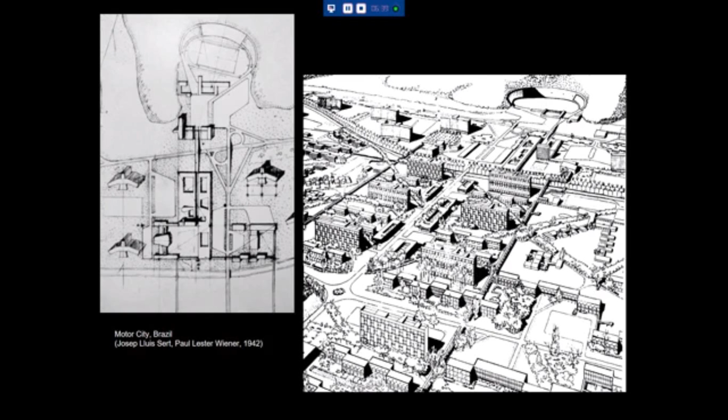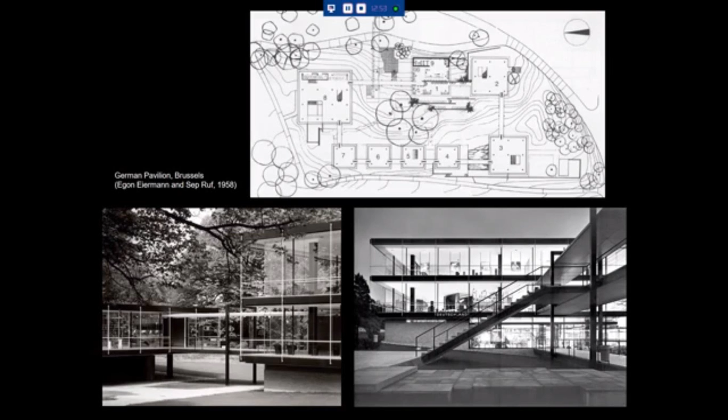This is a particularly good example from Europe, an early example, based on this campus type. This is an exhibition pavilion for the 1958 International Exhibition in Brussels by Egon Eiermann.

Very clear concept. The entire complex consists of 8 pavilions in 3 different sizes—4 small ones, 3 middle ones, and 1 large one—arranged around a cluster of mature trees, taking notice of the existing landscape. All are linked via walkways which strengthen the horizontal emphasis of the facility and help mediate between the different levels, as it's a rather slopey terrain. The pavilions themselves are all square and accessed asymmetrically, off the central axis. So, very clear concept-driven scheme.

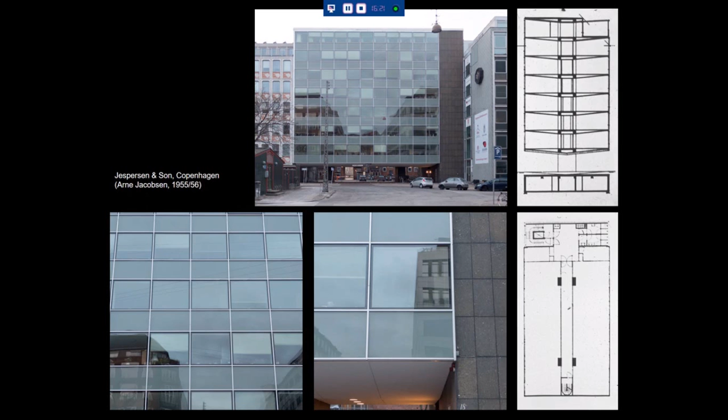This one here is inspired by the second type, the curtain wall high-rise type. Obviously this is not a high-rise, but you can clearly see the curtain wall, strongly inspired not so much by Mies's own buildings but by the Lever House—the detailing, the elevation treatment, and also the green-tinted windows, which was telltale of the Lever House. It's quite an interesting building, this one.

You go underneath the building and turn right, and this is the main entrance, which brings you into the vertical circulation core. Then you go into the actual office level, completely free of support apart from two pairs of concrete piers which carry the entire building and support these cantilevering floor plates, which taper towards the edge, allowing Jacobsen, the famous Danish architect, to attach the curtain wall to either side of the building. Now, the interesting thing here is that it sort of fakes its machine aesthetic.

In the United States, this type of architecture was possible, supported by a totally advanced building industry which prefabricated all these elements, only to be assembled on site. In the case of the Lever House, the building is a clear expression of the method by which it was built. Here, completely different—building industry in Europe wasn't as advanced yet at the time, so they couldn't actually prefabricate these things. This facade, although it looks like the result of very advanced building technology, is in fact handmade, all of it.

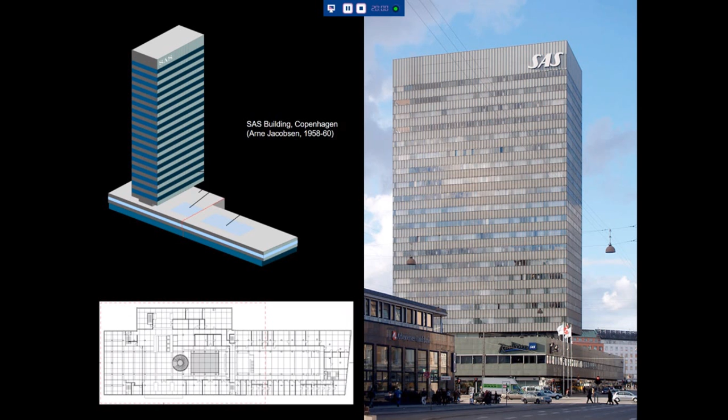So make the means available to us to actually build them. And they did—only a few years later, this is another building, also by Arne Jacobsen, a couple of blocks up the road, and this one is completely prefabricated.

To explain the building itself, the SAS building for Scandinavian Airlines System, the national air carrier, it had to accommodate three different things: a hotel, a travel agency, and an airport terminal. Professor Jackson mentioned last week this sort of upper-class romanticism which came with air travel in the mid-1950s up to the early 1960s, before it became commercialized. There was an airport terminal within the hotel, which I find rather amazing.

I'd love to have that. It's a very tight inner-city block, as you can make out here. The hotel is in this tower, the travel agency is here, and the airport terminal is here in this lower building, both illuminated via these generous skylights. The concept is directly taken from the Lever House.

This is called a tower and podium building, one of these post-war building types which were copied everywhere. Tower, podium - dividing functions into a vertical feature and a horizontal feature taking up the entire plot.

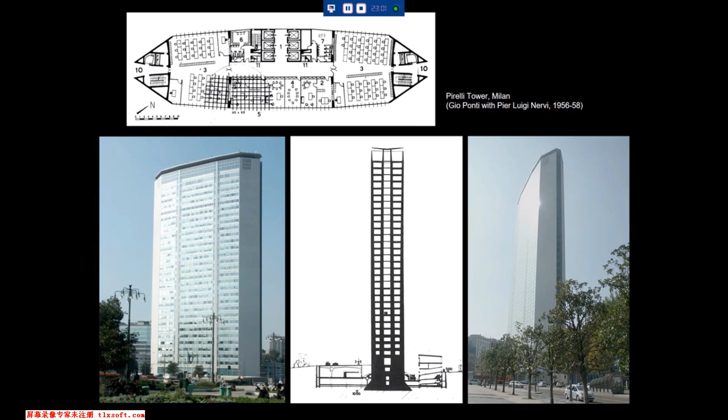The Pirelli Tower in Milan by Gio Ponti and his engineer Pier Luigi Nervi, one of the really brilliant structural engineers of the 20th century. You can see the familiar Miesian features of curtain wall consisting of metal panels and glazing and all that sort of thing. But you also see that this is not a mere copy - it's a really original take on this high-rise building type.

It's extremely slim and extremely high. In fact, it was the highest building in Italy up until the 1990s. Extremely slim, extremely high - you have a serious problem because of the wind loads that batter against the longer sides of the building, so you have to stabilize it.

What Pier Luigi Nervi did was he had these 8 massive concrete piers, which you can see here, here, here, here, and here, and they become thinner. They're really massive at the bottom, as you can see here - proper foundations. And they become thinner towards the top, in accordance with the diminishing structural loads. That stiffens the building.

There's an auditorium here as well. These are all office floors - that's one of them. And this is an auditorium buried underground, about twice the size of this one here. And then over here, a car park as well. And then these massive foundations becoming thinner.

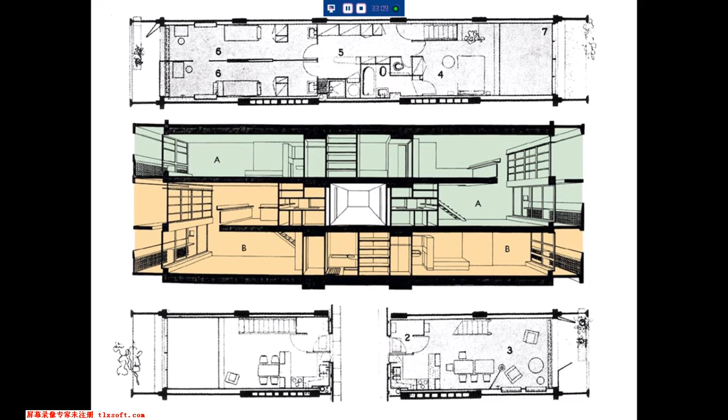This one here has these massive stilts which open up the ground floor. It's a bit shady, but still it opens the ground floor, and children can play there. Then you've got this shopping street halfway up the building, and there are sort of humanizing features in here.

So these colored partition walls between the balconies, and the entire elevation is based on a proportional system which Le Corbusier developed, which he called Modulor, based on the golden section, and in a Renaissance fashion links all the proportions of the buildings to the human body. He was rather obsessed with it.

The overall expression, however, is of course one of concrete. This is really what the building is about, and this is what brutalism is about. Le Corbusier referred to this as béton brut, raw concrete - brut, B-R-U-T - and this is the origin of the term brutalism.

There were functional reasons for this. A massive building of this size requires the participation of different building contractors, and Le Corbusier argued that it would have been impossible to maintain a consistent standard of finishes amongst so many different contractors. So he made a virtue out of this and just left it all raw and exposed.

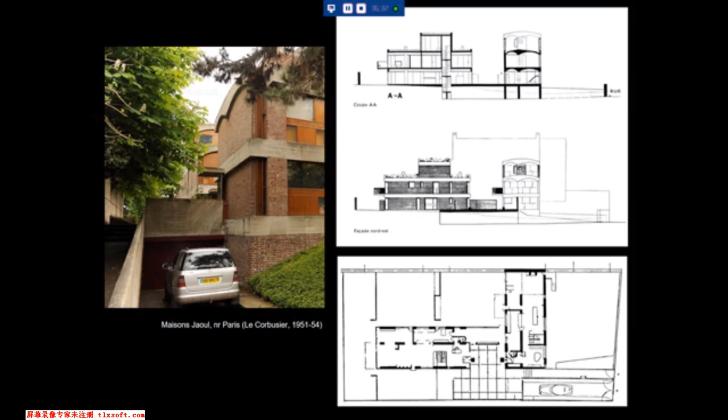Rather cleverly placed on a very narrow site, really using the natural slope of the site well to integrate this little car park, which is underneath the common entrance patio. The patio itself is accessed via this ramp, which leads to here. So underneath here is the car park, and this is one building, and this is the other.

What can we see here? Again, rough, exposed concrete, especially here, and also for these sort of awkward asymmetrical arches. But in this case, combined with two rather traditional materials, which you never would have found in any of these buildings of the 1930s - this rough, deliberately imperfect brickwork, and these timber infills, also deliberately imperfect.

So this is a sort of attempt to link up with a peasant vernacular - to bring modernism together with a time-honored regional tradition, far from being an international style, and also far from the 5 points which Corb had promoted in the 1920s and 1930s.

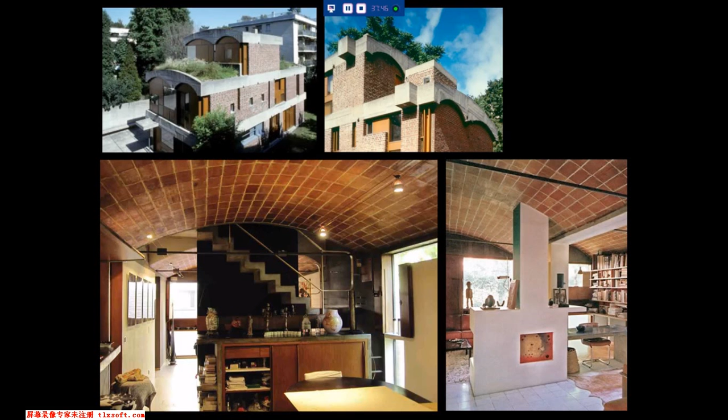Inside, same sort of thing. You have this extremely domestic type of house, which, if you compare it with the Villa Savoye, which looked like a design showroom, this is where people actually live, and it looks like people live here. It's got this brickwork and traditional elements such as these arches - this is called a Catalan vault - with these tiles, and a turf roof. A real change in expression and approach, as opposed to his earlier buildings.

People struggled with this - all of a sudden their admired master built something that seemed completely against his own principles. James Stirling, probably the best British architect of the past 100 years or so, grew up in Liverpool, studied here as well. He discussed this project and was very dismissive of it, but a few years later he built pretty much the same in his housing estate in Ham Common.

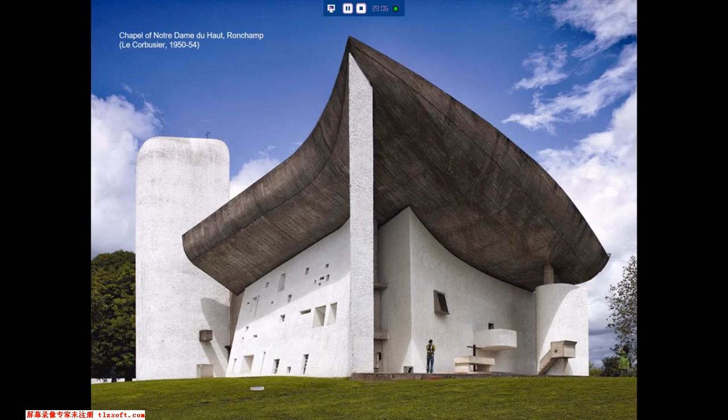So Corb did these two buildings, the Unité and the Maison Jaoul, at pretty much the same time. Both had nothing to do with what he did earlier. Both showed a completely new approach to modern architecture. And then, at the same time, he also built this. Now, this really bemused people.

It's a chapel in the east of France, not far from Le Corbusier's hometown of La Chaux-de-Fonds in Switzerland, just across the border, about half an hour from where he was born. He built this sort of sculptural body which is almost impossible to describe. It's inspired by the contours of the surrounding hills, and it's really a totally unique piece of architecture.

It has these concave walls towards the east and north, which are more or less shut, and then on the other side they're rather convex, bending out, with these random-seeming windows, which were in fact based again on his Modulor. You can see the thickness of the wall when you look at these gun slot windows here, and the walls make funny things - they're really thick at some points, and then they sort of go together, become wafer thin up here. On top of it all sits this heavy cloud of reinforced concrete.

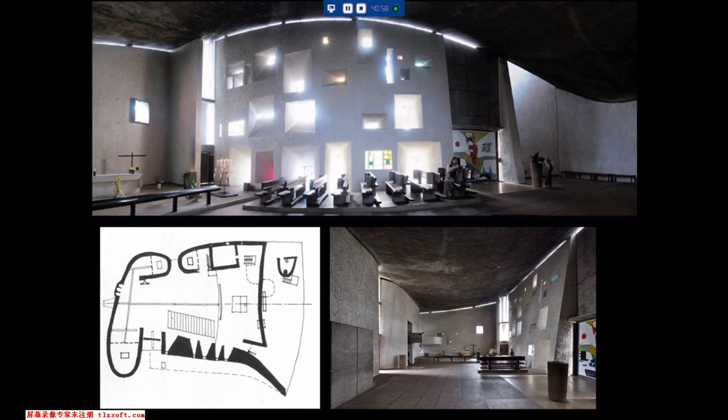Inside, same sort of informal arrangement with these really thick walls and these sort of awkward windows in different shapes and sizes. And then you've got this gap between these pebble dash walls and the concrete cloud, which gives it almost a sort of neon light effect, indicating the curvature of the wall when you're inside it. But the whole thing is almost like a cave - same materials inside and out. So it's really almost like a walk-in sculpture.

Very complex sort of arrangement, but actually achieved with rather minimal means. There are these 3 hooded towers - we saw one of them just now. They're integrated with these curved walls, which are sort of juxtaposed, and then you've got these really thick walls over here, and that's basically it.

So very interesting. And again, a total step away from what he used to do in the 1920s or 1930s. He had this creative explosion, putting forward completely different takes on modern architecture, and this one in particular.

Young architects in Europe looked at this and thought, hang on, our respected master takes liberties with this. Modern architecture doesn't have to be boxy, flat-roofed, white, with ribbon windows. No, other expressions are possible. It really had a liberating effect on his followers, who were most European architects. So if he could do it, why can't we? They started experimenting with different shapes, different forms, and it really sort of almost broke a dam.

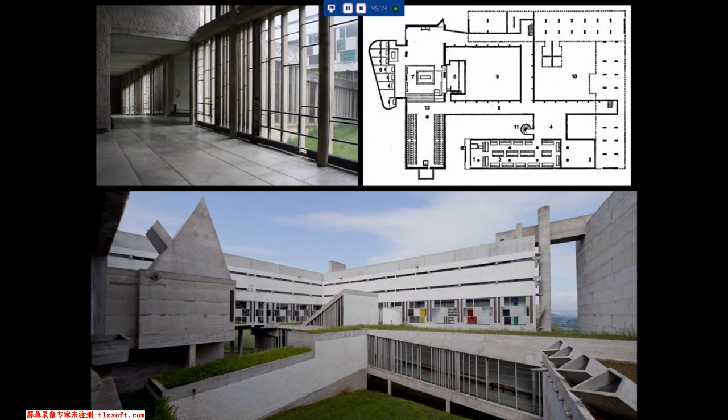So you can see the ondulatoire here, these concrete mullions which are set in front of the windows. Usually in a monastery, the key element is the cloister.

A cloister is a canopied walkway around a common green, a common courtyard which is the public space. The cloister divides this public central courtyard from the more private areas of the monks. That's a cloister, and that's what you usually find in a monastery.

Now, there was no way to have a central courtyard here because of the slope of the site. So what Corb did was reinterpret the idea of a cloister and of an inner courtyard by having these walkways crossing what he called a virtual courtyard. You can't actually access these areas, but you can look at them. And the walkways connect the different spaces within the building, similar to the way the cloister had done this.

So here's the church, here's the refectory, which I mentioned earlier, with this square-shaped atrium in front of it. There are some color accents here within the courtyard, but none of them outside. Here again, you can see there's a really strong image of this concrete block.

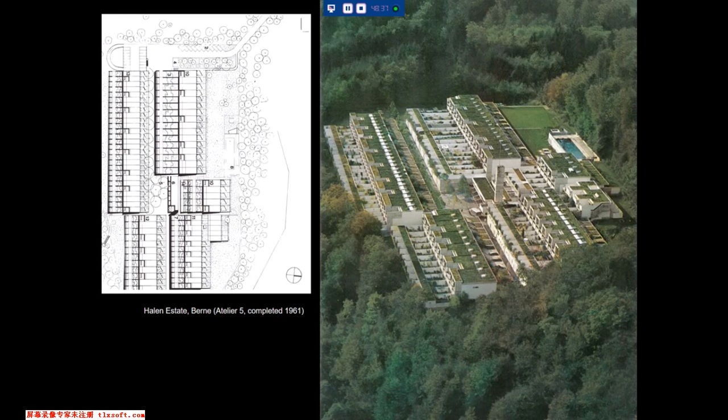We don't really have time to look at them in any detail. What I will do instead is show you two projects which take up opposite poles within this wide brutalist spectrum. Both are from Switzerland, and both are really good. This one here is a very famous housing estate, Halen, by Atelier 5 outside Bern. This is very Corbusian in many ways. It goes back to an unrealized scheme of Le Corbusier of 1949, Roq et Rob.

It has this idea, as you can see, of being on a slope, a south-facing slope, lovely area. And it tries to emulate an Italian hilltop village, complete with a central piazza, which it has here, and this concrete chimney which tries to look like a clock tower, which you'll find in every Italian town. There's a stepped path leading through here, past this village square, up to this public green, which has its own pool, which is rather nice. The square itself has all the village amenities: shops, restaurants, etc.

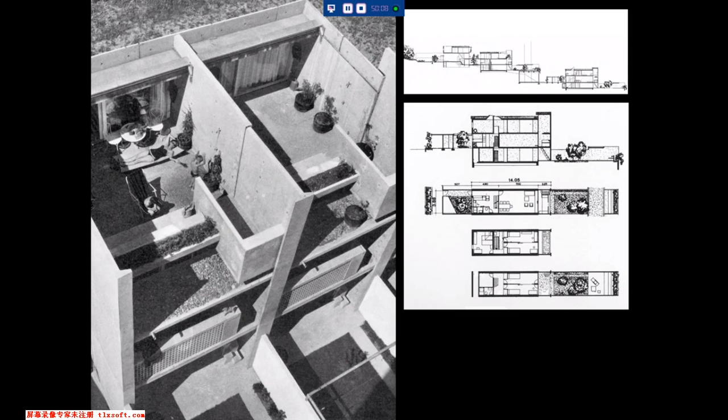We don't really have time to discuss the housing arrangements in detail. I strongly recommend you look them up, you'll find them very easily online. When it comes to housing layouts, this is about as good as it gets. Very influential, for instance, on Neave Brown's Camden housing schemes, which are equally brilliant and also worth looking up if you don't know them.

Essentially, there are two different house types here: one is the narrow one, and the other is the extremely narrow one, this one here. So it's all stretched around in a very narrow way, with accommodation spread over three stories to take advantage of this south-facing slope. Really, really good, very compact, high-density scheme.

This one here shows this central square with shops, restaurants, and children's playgrounds, in a slightly older picture, and this is a rather recent picture. Typical Corbusian elements, obviously exposed concrete, but also certain elements such as these perforated loggias, these so-called brise-soleil, and these small integrated balconies. These two you'll also find at the Unité d'Habitation.

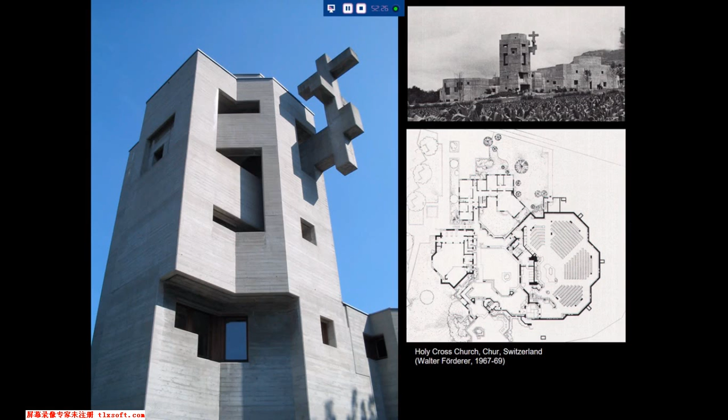So this is one, and the other side of the spectrum of brutalist architecture would be this one. Again, you can see this extreme smooth quality of the exposed concrete. Concrete can be as beautiful as any other material if it's produced properly and maintained properly.

That's the floor plan. Much of it sunk into the ground, but even what sticks out still has a rather impressive appearance. The floor plan, obviously inspired by Ronchamp, with this wish to avoid right angles wherever possible, and this sort of informal arrangement. The Swiss artist and architect built quite a few of these buildings, mostly churches, but also schools and a bank, and they all look more or less like this.

In fact, this is one of his more restrained buildings. Some of the others are considerably wilder than this one. But even this one is quite something.

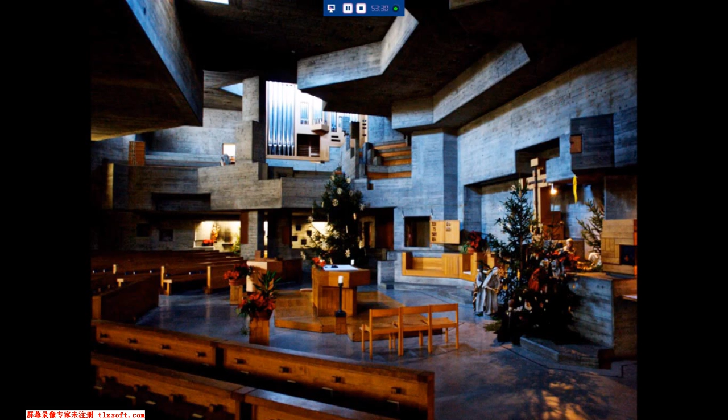You can see again this sort of cave-like feel which Ronchamp had as well, and also this sort of informal, undefined illumination through awkwardly placed light sources.

One thing that's really interesting here is the way furniture and fittings are combined or fitted in with the concrete structure, which is something, if you know the Barbican in London, it has that as well. You can see it very well here, or here, and even the organ. So it's all sort of designed together, built as one entity, as one unit.

It's this idea of architecture, the building as a sort of total work of art, which goes back to the arts and crafts period, and is something which we saw in our modernism lecture at the Sommerfeld House of Gropius, where the interior is pretty much considered an essential part of the architect's work, just like the building itself.

Here you can see the same interior again, different lighting conditions. Notice the precision and care that went into the detailing and the alignment of the timber shuttering along the edges, and also the way these light fittings are flush with the surface. So very careful, very good building.

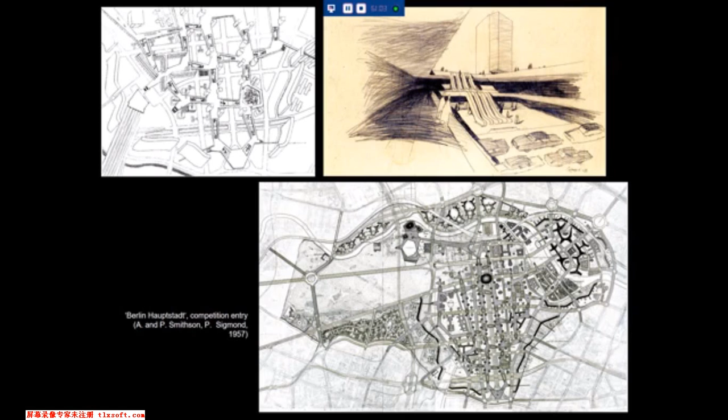In my introductory lecture, I pointed out that one of the drivers of brutalist architecture and post-war architecture generally, the sort of size and scale it had, was in part driven by this wish to find an architectural expression which could visually compete with these new massive road networks. This is pretty much an example of this type of architecture. If you drive here, you can see these towers, and these towers indicate a connection between the two levels. Similar ideas drove these massive housing estates, and also these curvy buildings here, which would have been office buildings. As I said, wasn't realized. This one was.

Again, one of the projects emerging from this Team 10 context, probably the most important one, or certainly one of the earliest ones, and a very famous building - the Orphanage by Aldo van Eyck, a very young Dutch architect. It was his first building, and it remained his best building. What do we see here?

Essentially, architects were conscious of the fact that, or they thought, architecture in future would be based on prefabrication, on industrial building, on system building. The challenge for architects was to get on top of these systems. The inherent danger of an industrialized building industry is that they develop systems, and you as an architect end up just implementing what others produce for you, which takes the responsibility for the design away from you. That was a keenly felt danger of post-war architects. They were aware they had to work with systems, but they had to find a way to make these systems work for them, rather than the other way around.

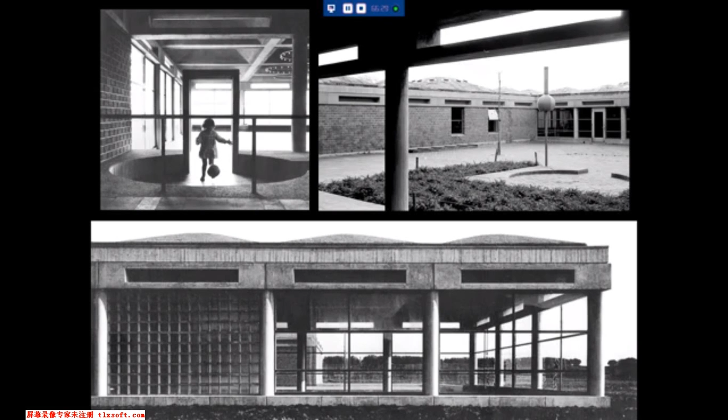Very specific architecture. These units here are modeled on the Dogon family houses. Van Eyck was pretty much the first architect who had any interest in the workings of the Dogon. This is what it looked like architecturally, or at least what it did look like. These are old pictures - now it's all painted indiscriminately, which is a real shame. Originally it had this typical combination of exposed brickwork and concrete, which we saw at Maison Jaoul.

Again, these pillars here indicate the conceptual grid on which the facility is based. They don't actually carry a lot - the interior pillars carry the weight. So this is just to visualize this grid.

And you can see these attempts at producing a childlike architecture by the low height of these steps, also the low height of windowsills and glazing bars. Nowadays it all looks a little bit not very child-friendly, but at the time it was quite revolutionary to even consider the scale of children.

This is called a mat building. A mat building sort of reverses the idea of figure and ground. Usually you have ground, and you place your building as an object on this ground. The idea here is that the building covers the entire ground, and spaces are carved out of it.

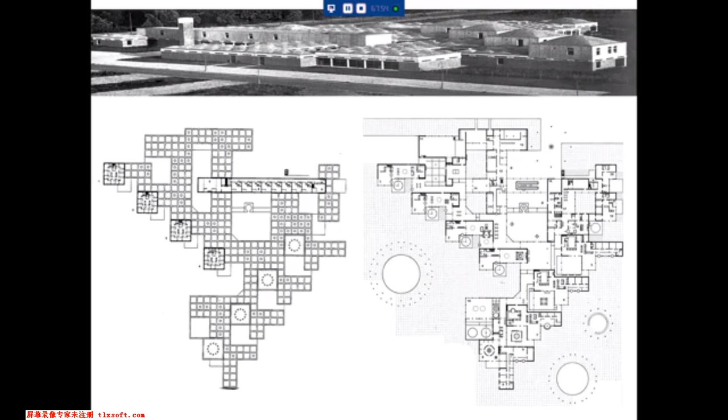Okay, this is called a mat building, and I went back because this one here is another mat building - again Team 10 architects, Candilis Josic Woods. This is the Philological Institute of the Free University in Berlin. This is really vast - I don't know how many hundred thousand square meters, but it's immense.

The idea here, the conceptual driver, is the corridors. They are the only permanent feature of this building. Everything else was subject to change - all the spatial configurations were meant to be replaceable, exchangeable, extendable, however you wished. Only the corridors are permanent.

It sort of reflects this 1960s idea of education pursued without hierarchies. So lecturers, administrative staff, even students could rearrange their spaces according to their requirements at any time. So this was the idea behind this. And...

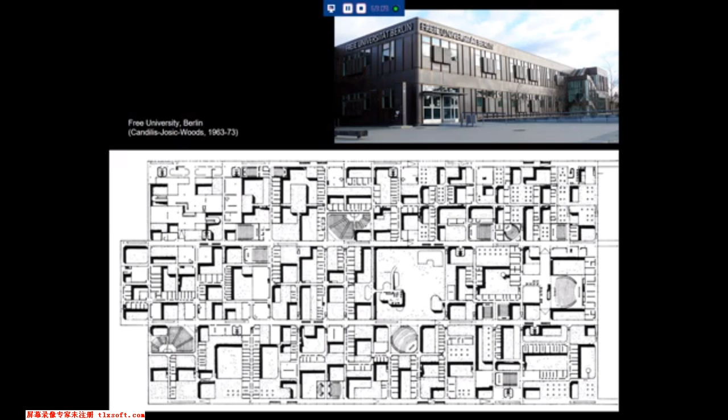This is what it looks like inside. So what you see in this picture, the corridor, is permanent. Everything else could be changed, could be altered. It was developed in collaboration with a very good structural engineer called Jean Prouve, who developed a system of concrete-encased steel columns and steel beams and prefabricated concrete slabs on top of it.

And it extends to the facade as well, which is made of Corten steel panels, which could also be demounted, detached, very easily if you wanted to expand the building.

Didn't quite work in the end. I mean, it's still there, and they still use it, and it was renovated, I think, by Norman Foster. But it didn't really work the way it was intended to work.

Partly, I would say, because this idea of creating architecture which users can change is something that appeals to us architects. It's a thought that's really attractive as a designer, to create this system which people can then use however they like. But in reality, ordinary people find it much easier to adapt their work routines to a given space rather than adapting the space to their work routines.

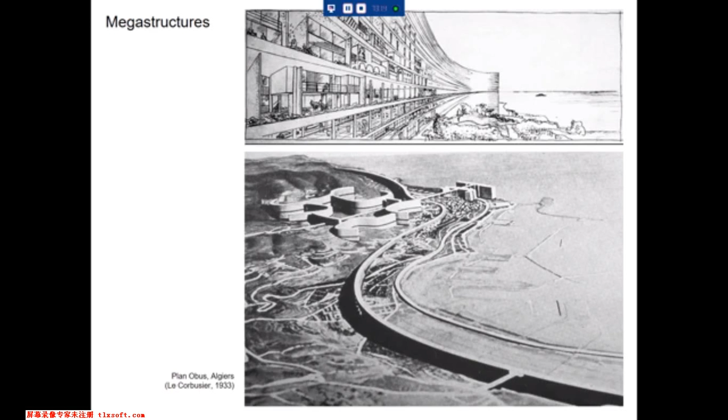The ones who really pushed this to the limits were Kenzo Tange and his Metabolist group in Japan. Kenzo Tange was not himself a member of the Metabolist group, but he was a father figure. By the way, I mentioned the Tokyo plan in my introductory lecture, and going back through my slides, I noticed I actually used the wrong picture illustrating it. The picture I used was another megastructural project by a man called Arata Isozaki, who was a student of Kenzo Tange's.

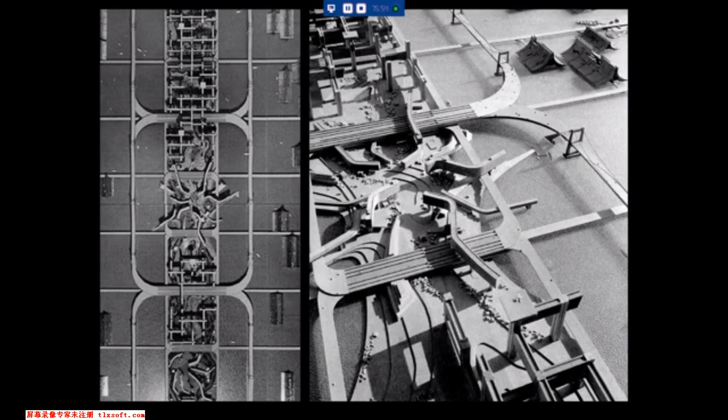Here are these elevated motorway loops, and in between you have all the office buildings, multi-story buildings basically seen as bridge trusses and carried by massive service towers. Branching off are secondary spines leading to floating concrete platforms—that's not the actual housing, that's the platform on which the housing would be built, accessed from underneath via a little access road, and then you go into your building.

Just to give you an idea of the scale, the length of each of these suspension bridges is more or less the width of the Mersey between Albert Dock and Birkenhead. Absolutely gobsmacking. The interesting thing is you don't really know how much of it was meant as a realistic proposition and how much was pure fancy. That really encapsulates the 1960s, with its enormous energy, richness, and total faith in progress. This particular scheme could only have been devised in this particular decade.

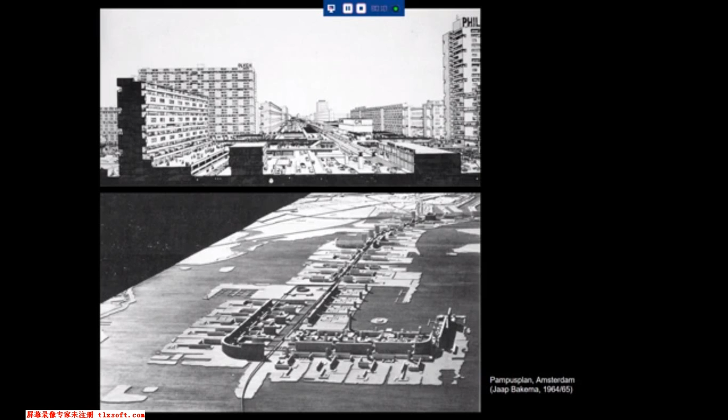There are some realized examples of this type of megastructural architecture in Europe. We have a particularly interesting one not far from here, Park Hill in Sheffield. If you don't know it, you should go and see it. It's really marvelous, an extremely interesting scheme, which comes out of the same sort of context.

Candilis-Josic-Woods, by the way, built a similar project to this one outside Paris, Bobigny. And when I was your age, naively, stupidly, I thought I'd go and have a look on my own. I ended up being chased by a large group of youngsters who obviously didn't appreciate some entitled student idiot photographing their neighborhood and housing conditions. I escaped unharmed, but I did have to sacrifice my camera, and I've never gone back there since. So you see, architectural history is not entirely risk-free, if you're a bit, not very clever.

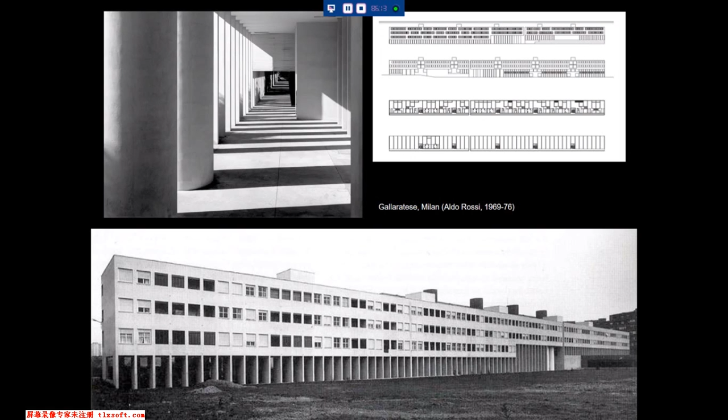In the 60s, 70s, and 80s, mostly 70s and 80s, these different tendencies were grouped under the umbrella term of postmodernism - different tendencies, all challenging the primacy of modern architecture. In the remainder of our lecture today, we will look at three of these tendencies. There are more than these three, but there's only so much time we have.

The first one was, in fact, instigated by Aldo Rossi, who spoke with us. So, this is a housing block in Gallaratese, Milan. You can see the sort of classically Italian features, a colonnade running along the length of the entire building.